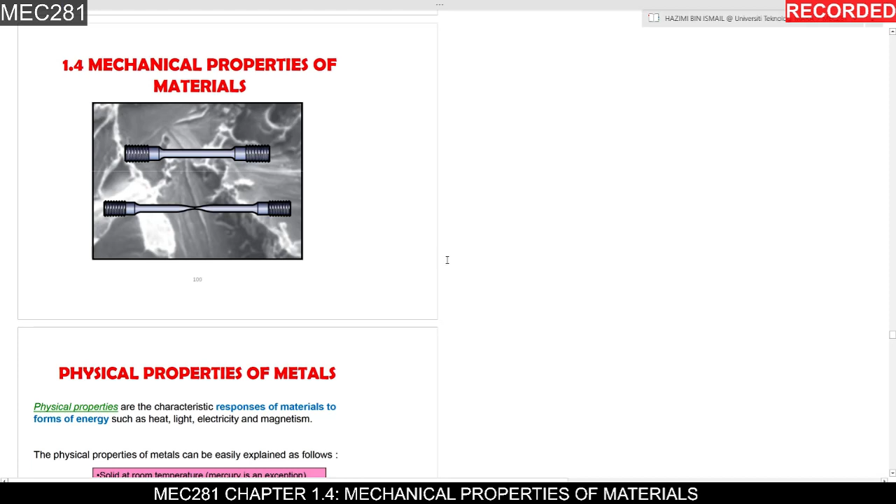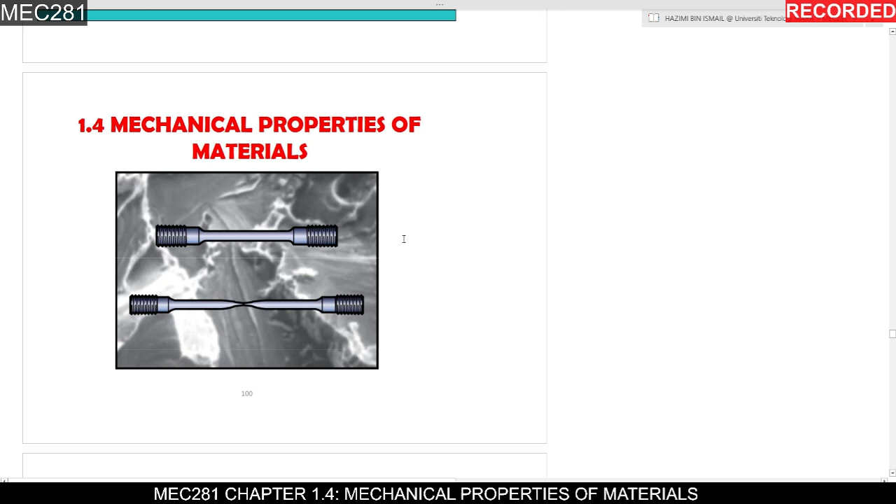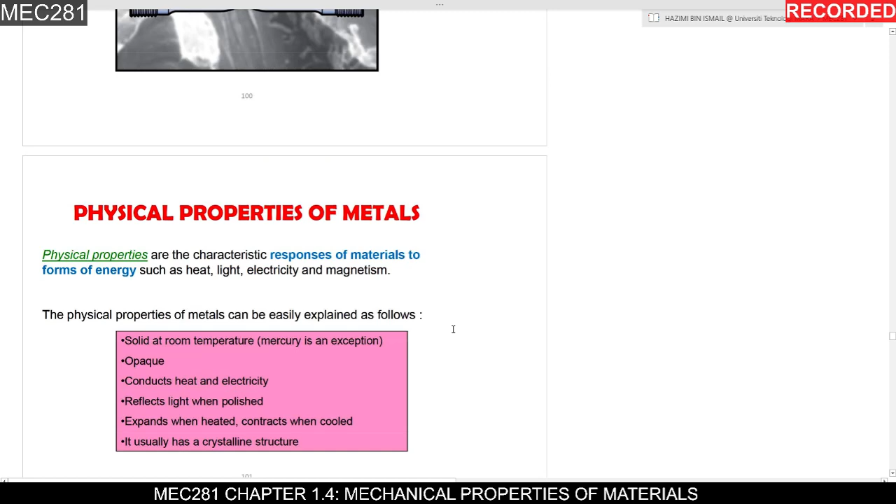In this video, we are going to learn about subchapter 1.4, mechanical properties of materials. This subchapter is more on the theories, and I will go faster in this video. At the end of this video, you have to do the exercises found in the notes, and then submit the answers through our Google Classroom.

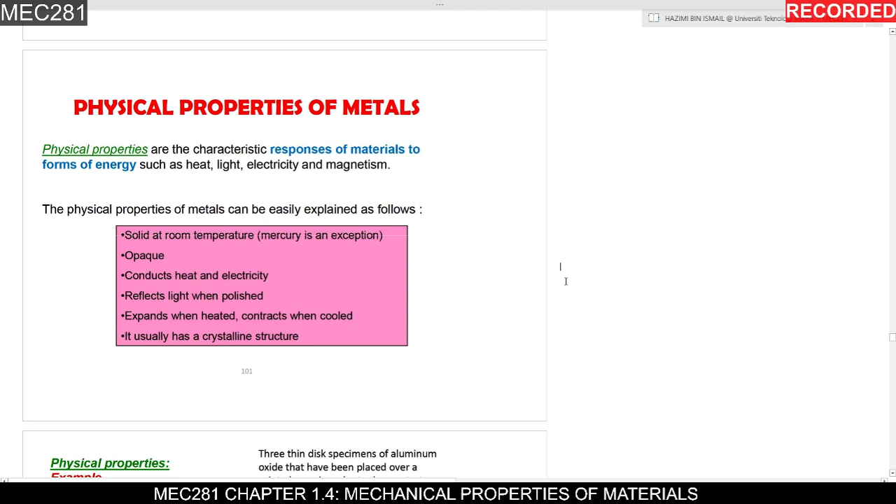Like I said, this chapter is more on the theories, so it's better if you read it in detail on your own, because if I read or explain these slides, it may become very boring and waste your time. So let's go faster in this subchapter.

Let's start with the definition of physical properties. Physical properties are the characteristic response of materials to forms of energy such as heat, light, electricity, and magnetism. The physical properties of metals can be explained as follows: solid at room temperature, opaque, conduct heat and electricity, reflect light when polished, expand when heated, contract when cooled. It usually has a crystalline structure.

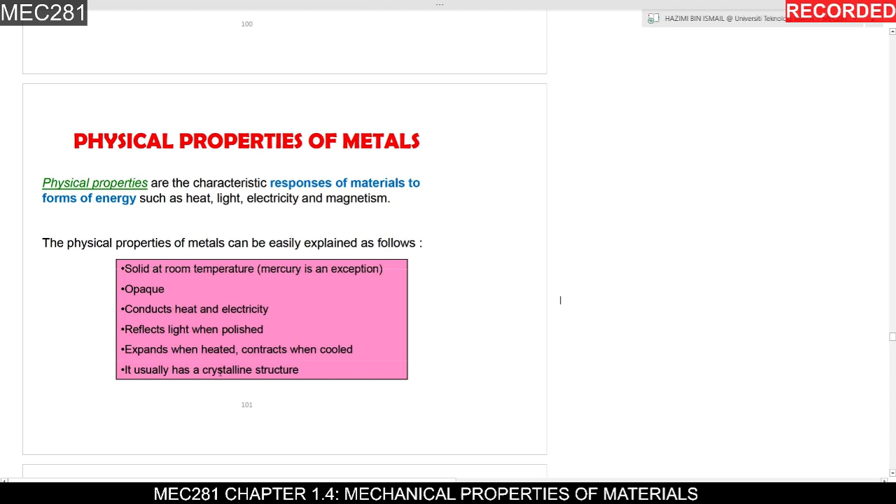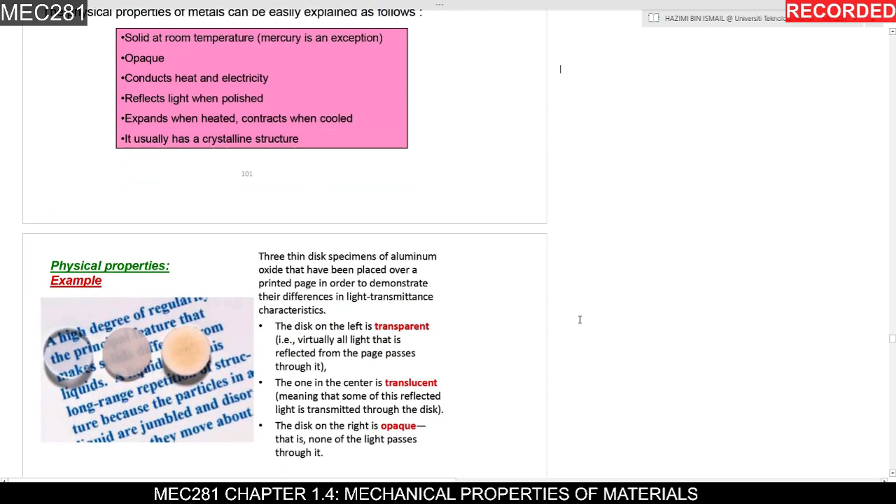You must be familiar with the term crystalline structure that we already learned in subchapters 1.2 and 1.3. An example of physical properties here is aluminum oxide. It has three types of properties. One is transparent; we know what transparent means.

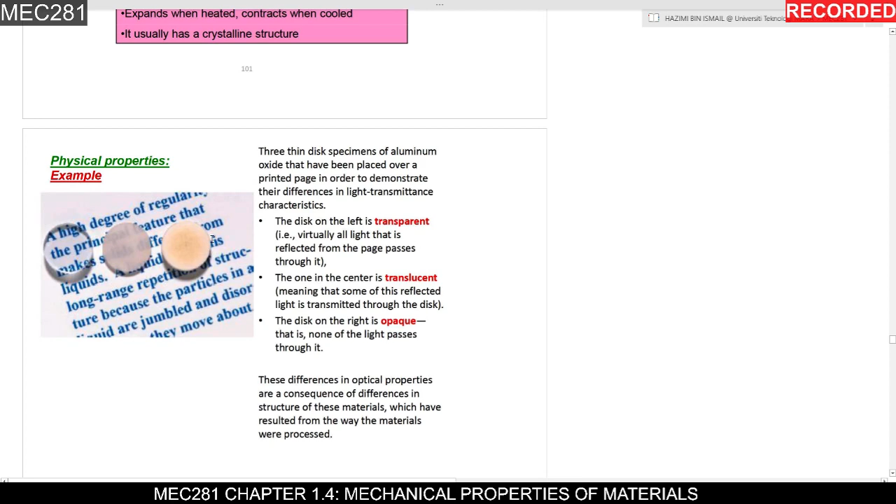Then there is translucent, separuh cahaya, semi light through. And then opaque, or in Malay we call it gelap, legap, right? So no light passes through materials with opaque properties.

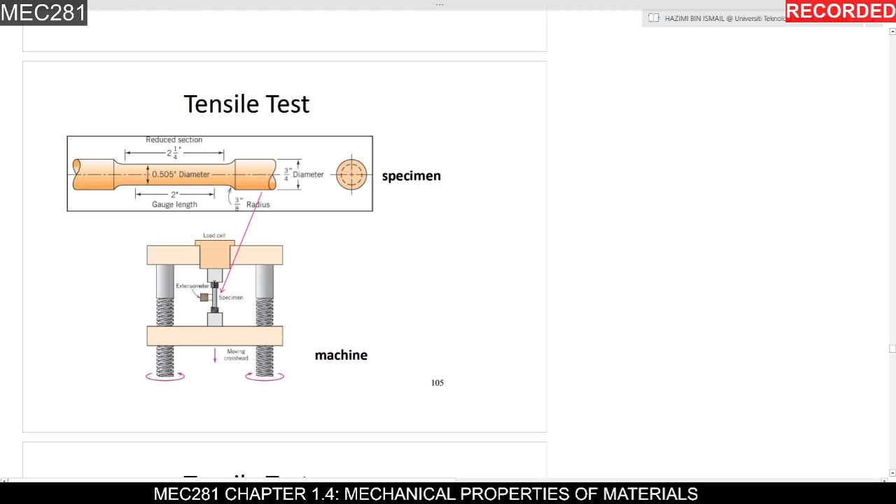I think you are already familiar with the term tensile. Tensile is focused on in the subject of strength, the other subject. So let's go through the tensile test: tensile stress and strain. This was already learned in the subject of strength, so I think you know about tensile stress, how to calculate the stress, and so on. Basically, the formula for stress is equal to force over area, like this.

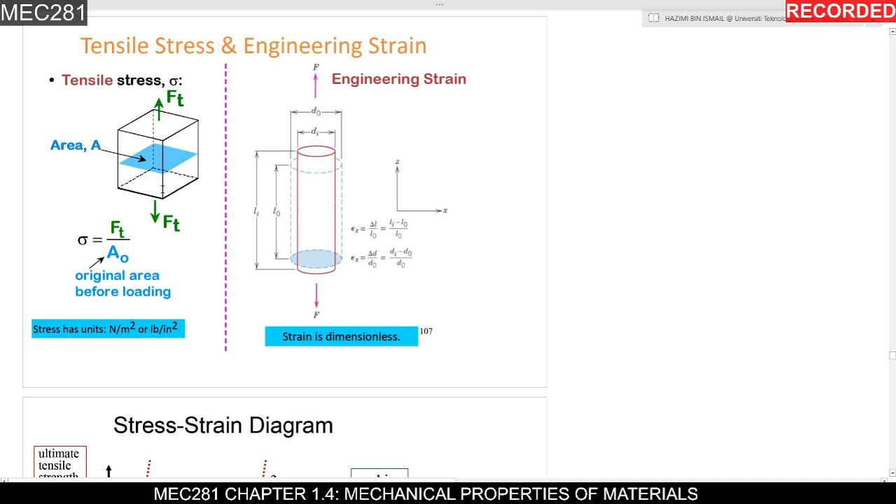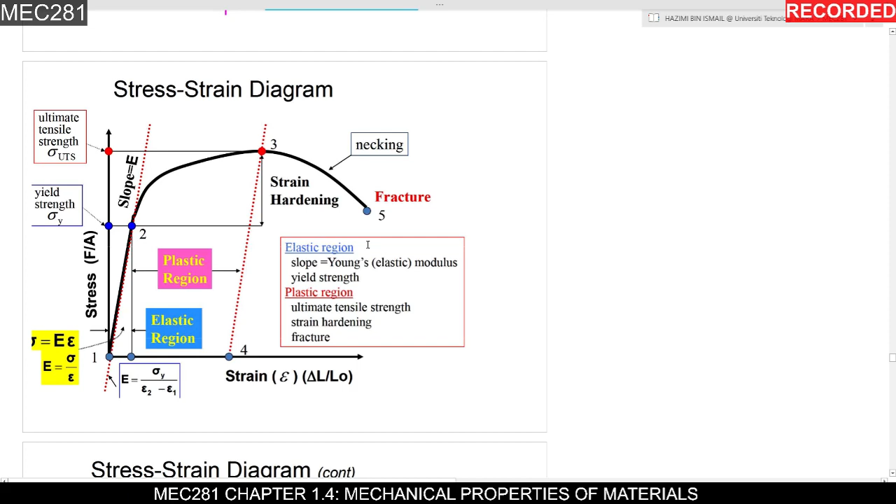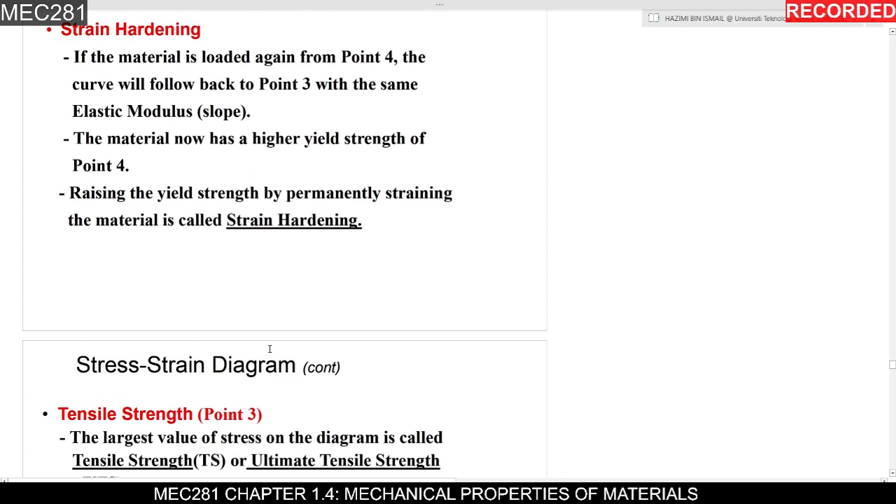This is the stress and strain diagram. From there we have what we call the elastic region and plastic region. What is the elastic region? In the elastic region, the material returns to its original shape after it is unloaded, like a rubber band. After it passes through that region, it will fracture. Putus dan lain-lain lah.

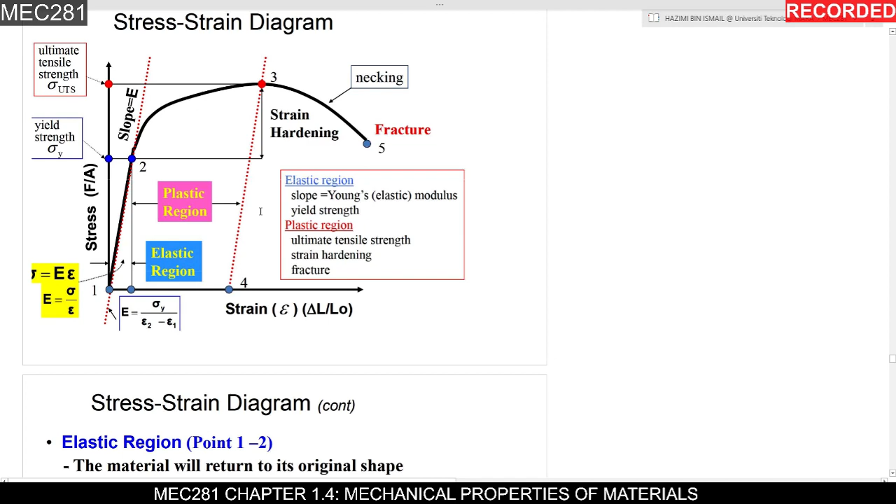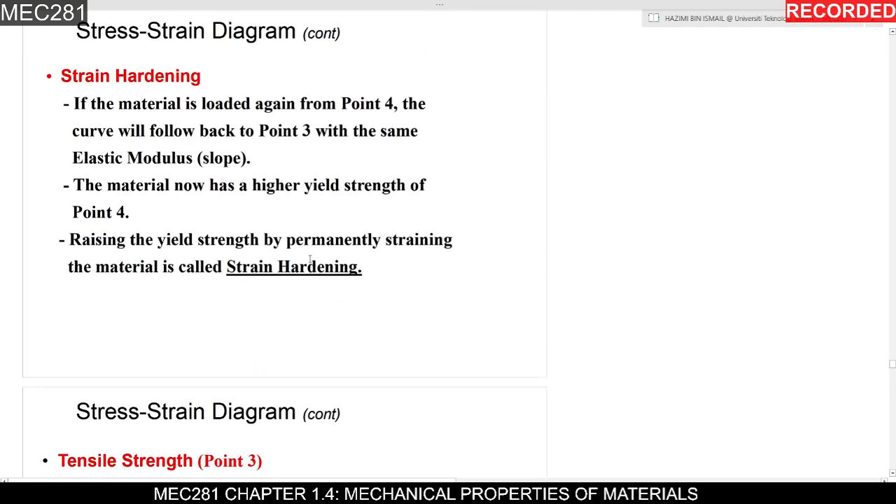So this is all about the stress and strain diagram. It can give you information about the elastic region, yield strength, and so on. I think this is more on your own effort to read in detail.

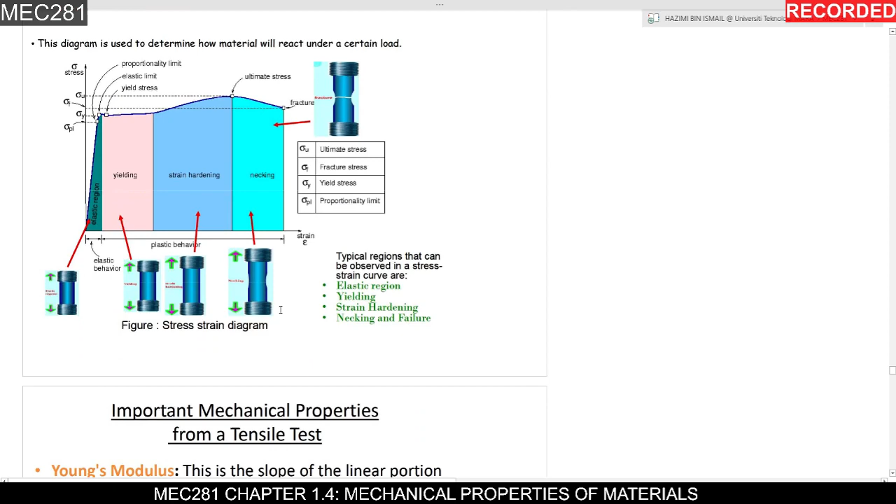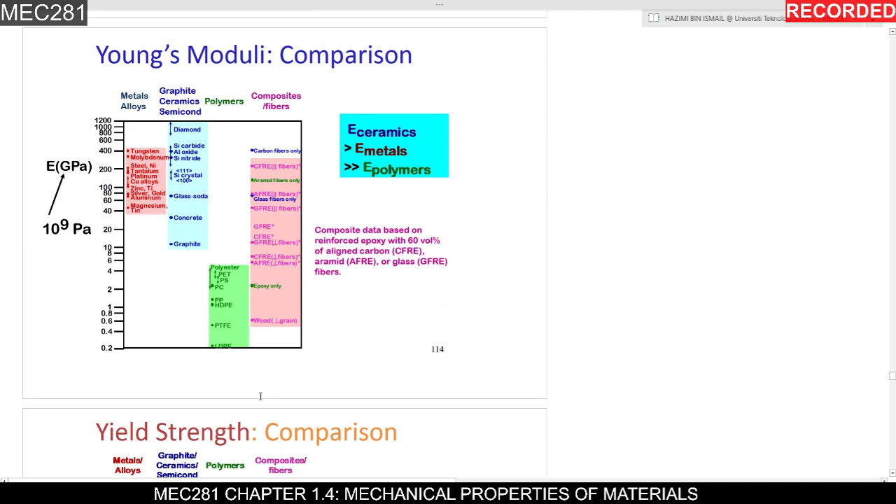Important mechanical properties from a tensile test: we can know the Young's modulus, yield strength, ultimate tensile strength, and percent elongation. So the tensile test is very important because we can know all of this information.

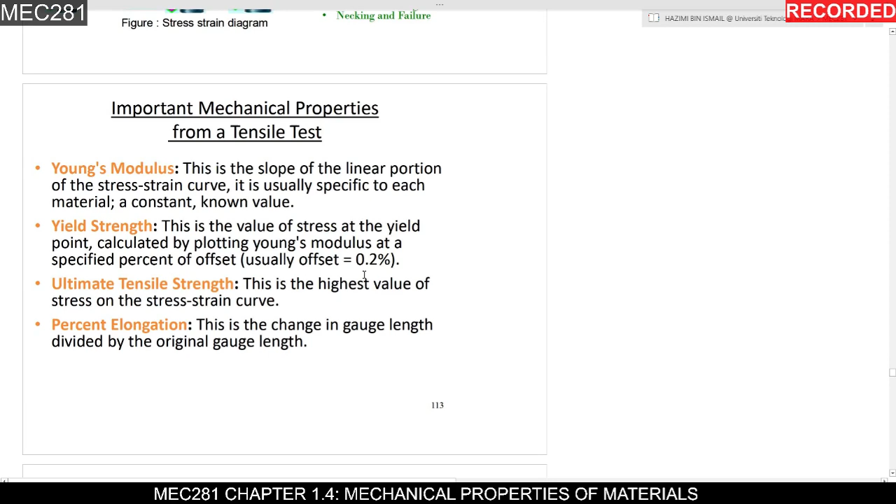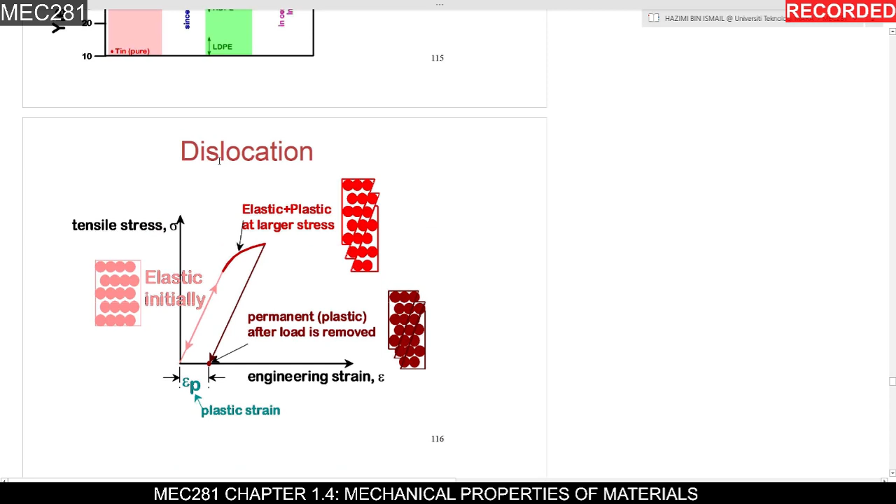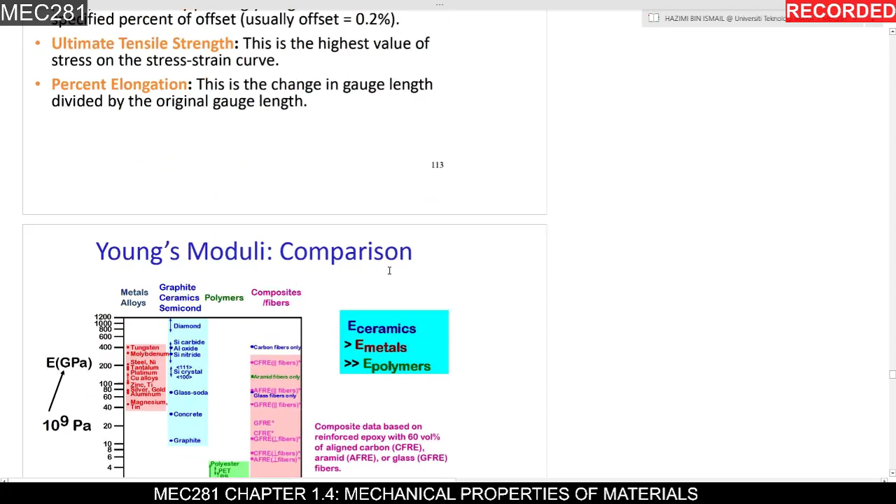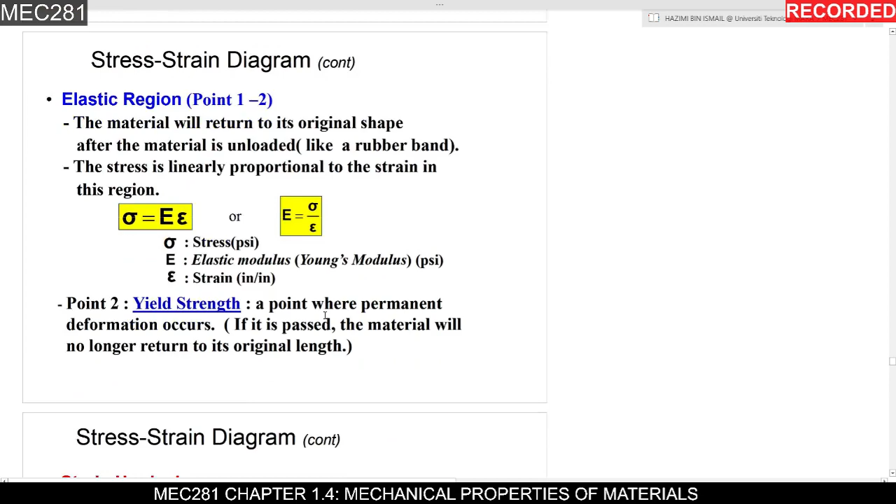Back to the basics of elastic: the material returns to its original shape after it is unloaded. That's why it returns to the initial shape after you unload the mass or force. Atomic bonds are stretched but not broken. Once the force is no longer applied, the object returns to its original shape, and elastic means reversible. It can stretch and return back to its original shape. That's what we call elastic. And then plastic deformation.

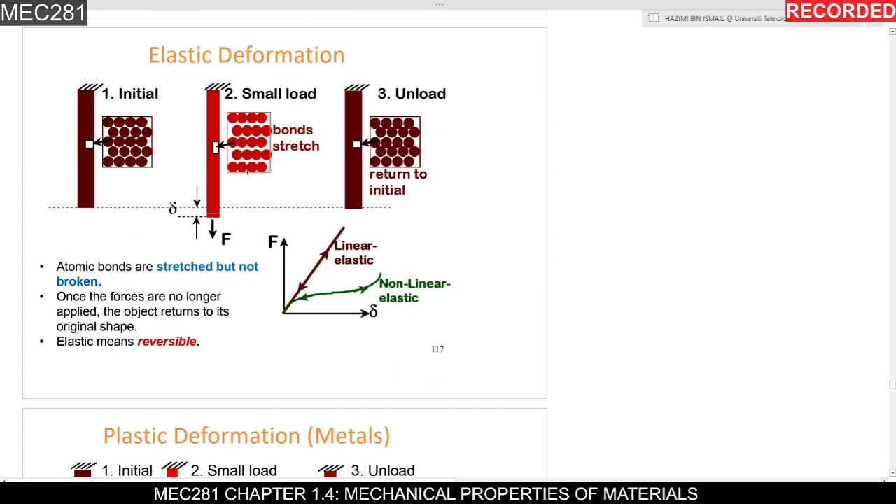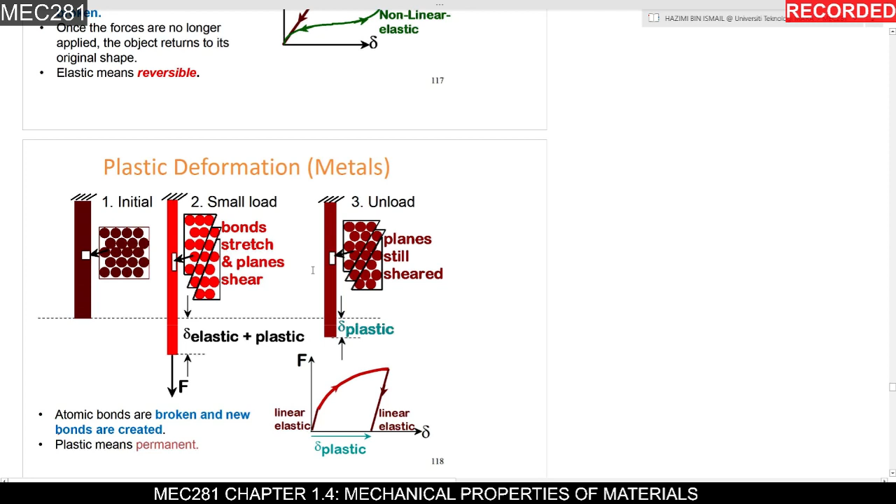Okay, the difference compared to the elastic deformation here is when you put the small load, the bonds stretch and the planes shear. Okay, and then when you unload that force, the planes still shear. Okay, so it will change the formation of that material. So atomic bonds are broken and new bonds are created. Plastic means permanent. So elastic means reversible, plastic means permanent.

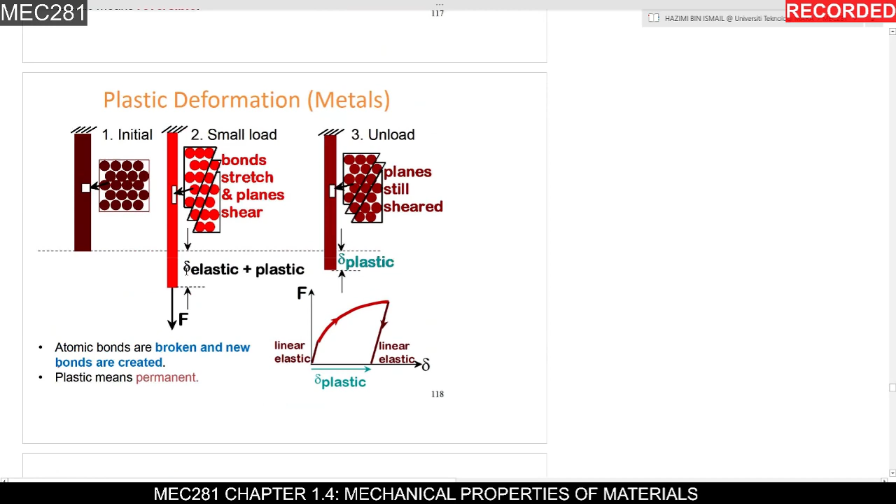So if I say that material is plastic, when you put force, the shape changes, and the changed shape will remain, and it cannot go back to the original form. Okay, so that's the difference between plastic and elastic.

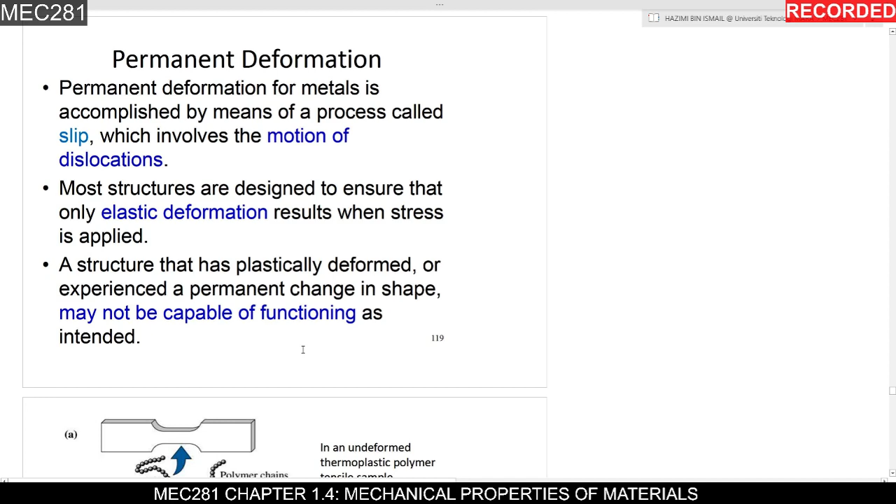Okay, permanent deformation. Permanent deformation for metals is accomplished by means of a process called slip, which involves the motion of dislocations. Most structures are designed to ensure that only elastic deformation results when stress is applied. A structure that has plastically deformed or experienced a permanent change in shape may not be capable of functioning as intended. So that's why in most engineering applications we try to have materials with elastic deformation properties.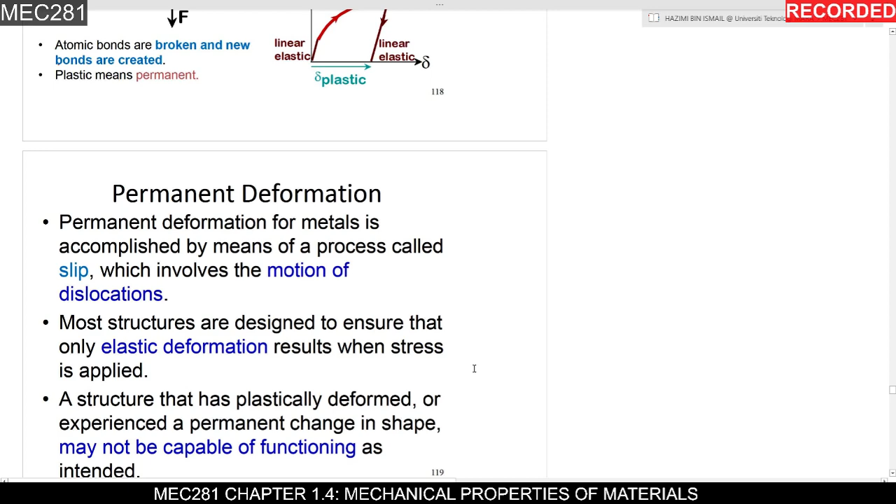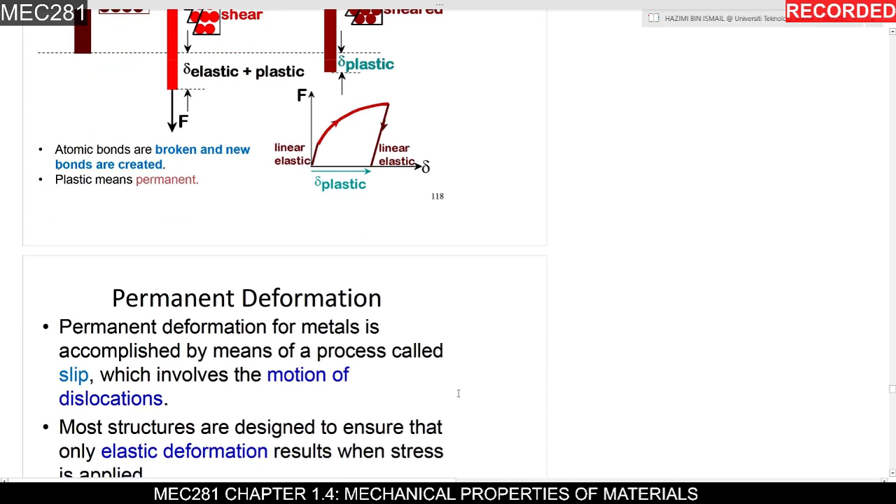Okay, can you imagine if we put plastic deformation materials on a structure, on a bridge structure? When it changes form a little bit through the heating during a very hot day, what happens? Then it can fall. Okay, so that's why we have to study the material properties of any metals in engineering applications. It is very essential.

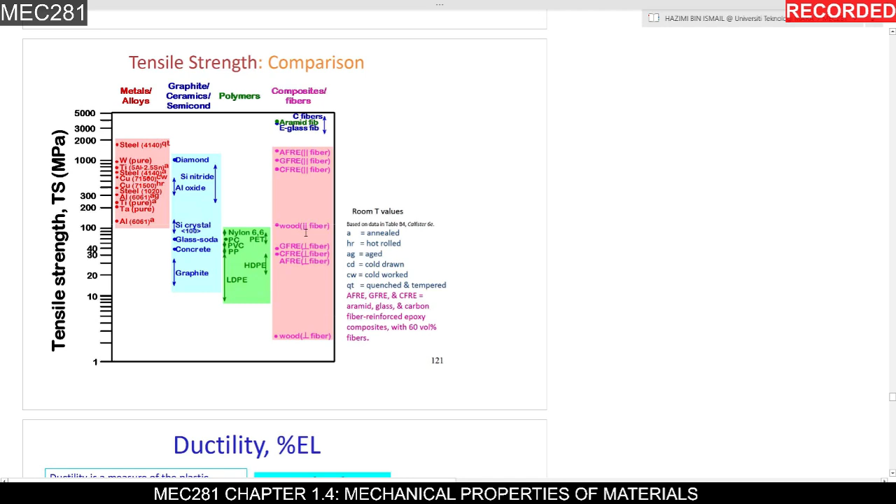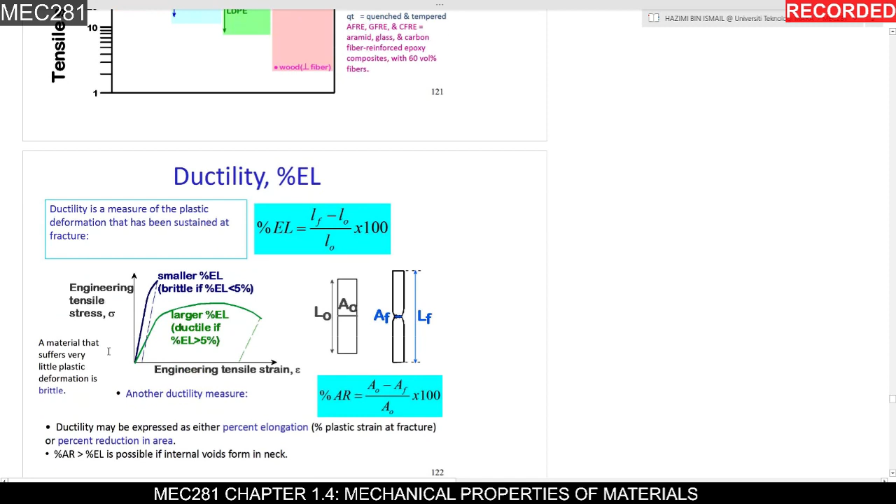So this is about the tensile strength. You can see here from this graph, the tensile strength of steel and so on has a much higher value compared to fiber and composites like wood. Okay, and ductility. What is the meaning of ductility? Ductility is a measure of the plastic deformation that has been sustained at fracture. And this is what we call the equation for the ductility value. So you have to know the basics of what ductility is.

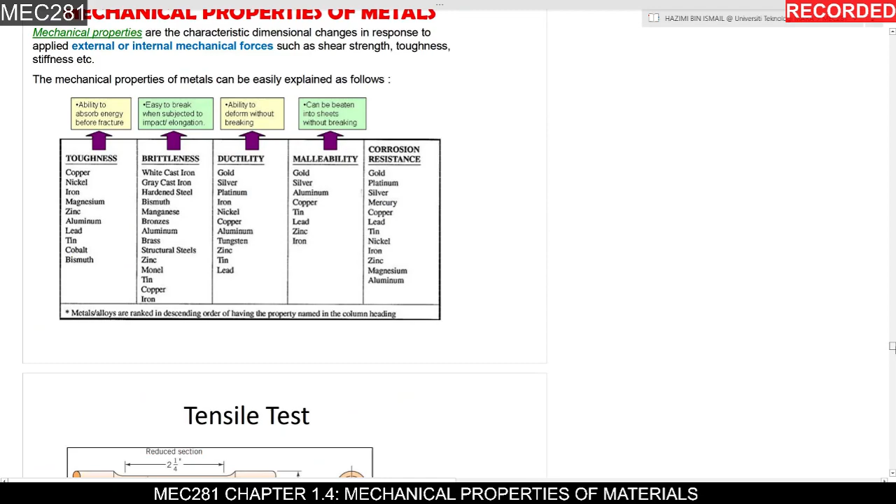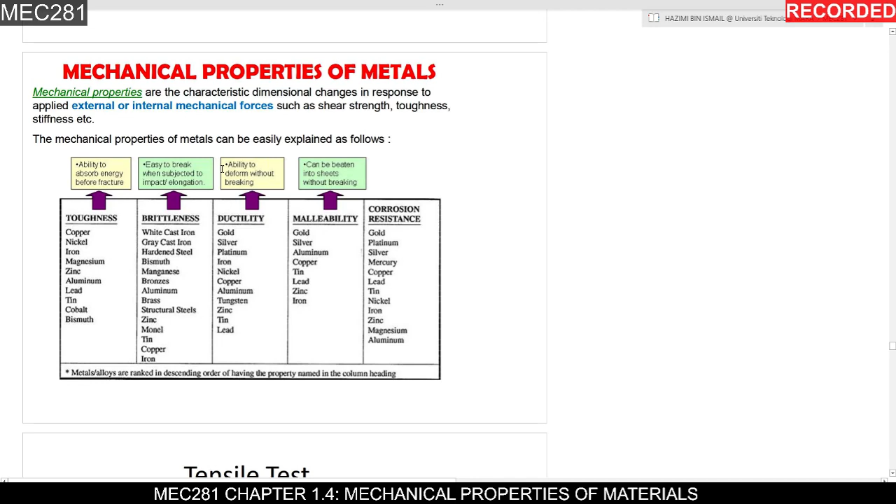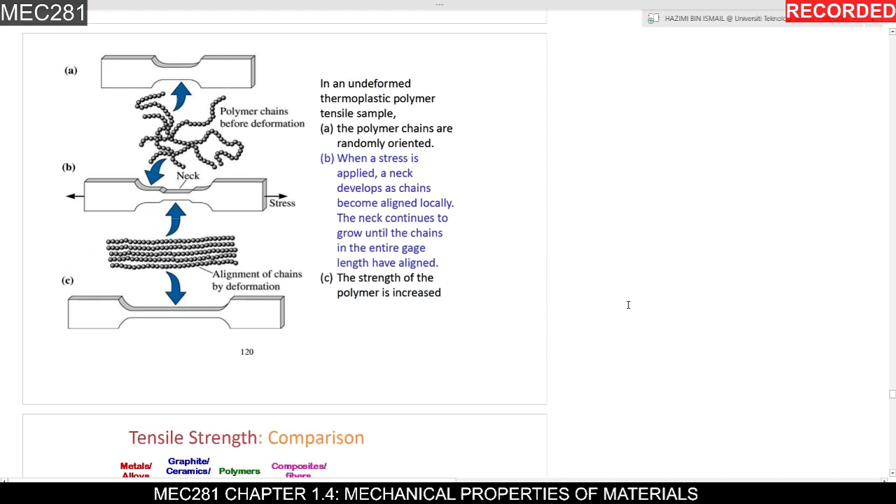And then the toughness. Toughness is the ability to absorb energy up to fracture. If you are still confused with the definition, you can return to the early slides that explain what toughness, brittleness, ductility, and malleability are. Once again, let's try to define ductility. It is an ability to deform without breaking. So more ductile means that it can change form without breaking, undergoing permanent deformation.

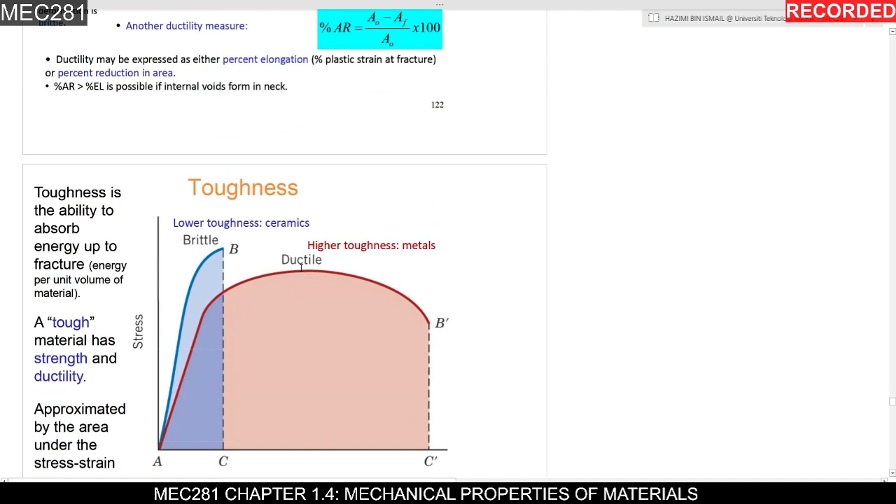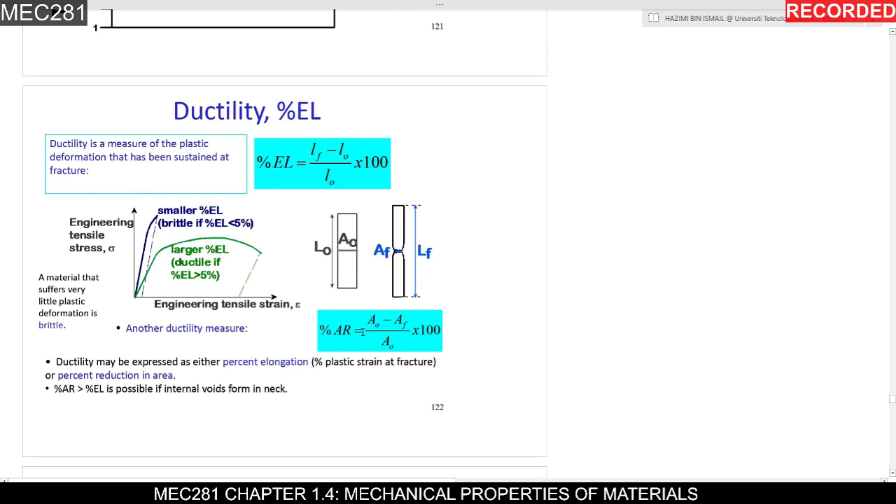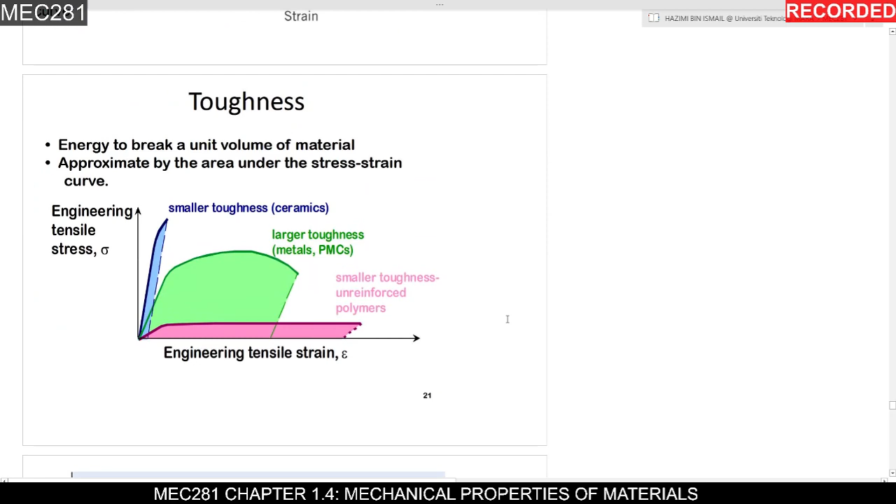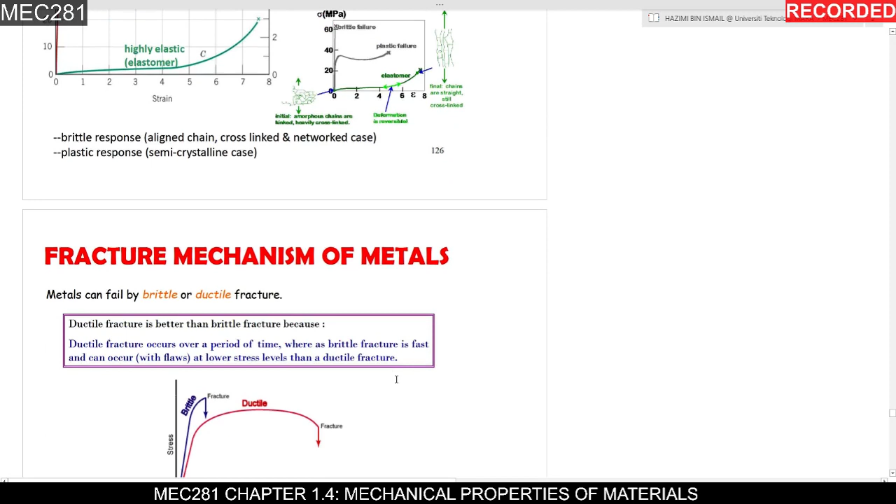Okay, so from the value of ductility here, we can know what is the best material for your engineering applications. So that is what we study about material mechanical properties. It's all text, so that's why I mentioned earlier you have to read it on your own. If I just read these slides, it may become boring. So let's go faster.

Okay, fracture mechanism of metals. Metals can fail by brittle or ductile fracture. Ductile fracture is better than brittle fracture because ductile fracture occurs over a period of time, whereas brittle fracture is fast and can occur at lower stress levels than ductile fracture. So ductile means that it takes time to fail, but brittle is instantaneous, very fast to fail.

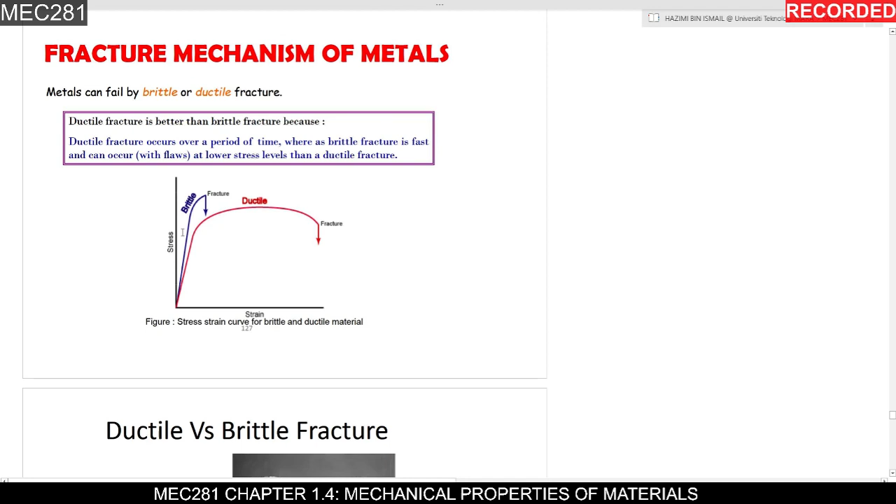Okay, so this is the diagram showing the difference between ductile and brittle fracture. From here I think it is logical, it takes a very long time to break here, right? Compared to this brittle one where it just snaps,

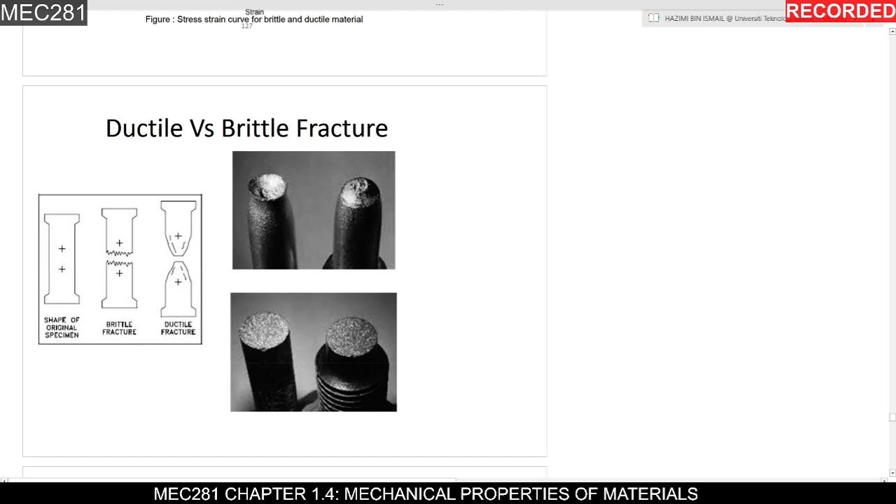Okay, this one is the ductile fracture and this one is the brittle fracture. You can read it on your own.

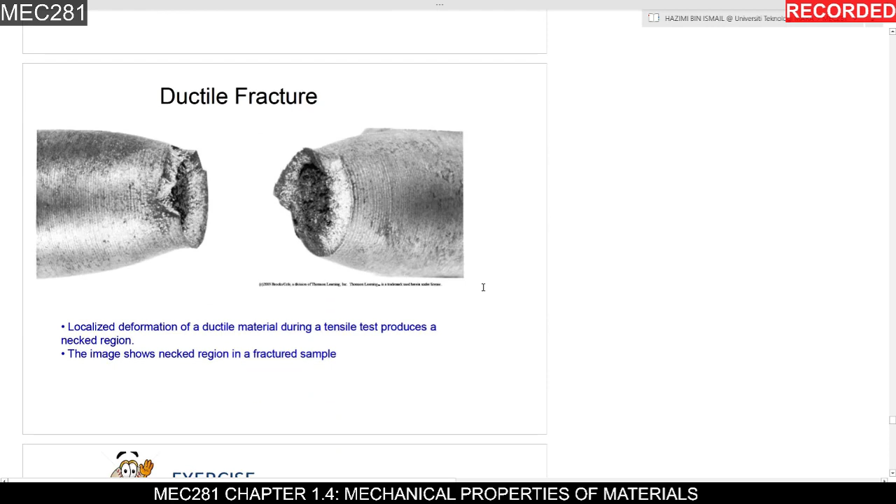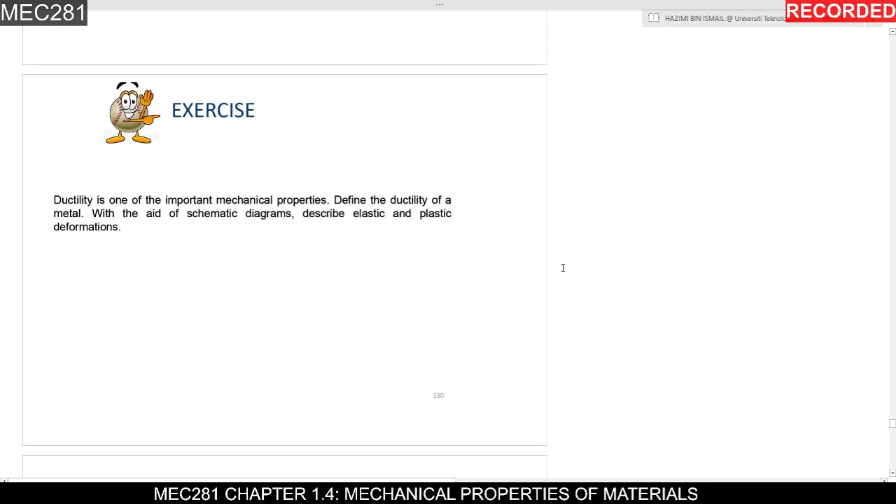Okay, so this is the exercise. This is one of your questions that you have to write, and your answer has to be submitted through Google Classroom. Please remember, you have to complete this one and submit it via Google Classroom.

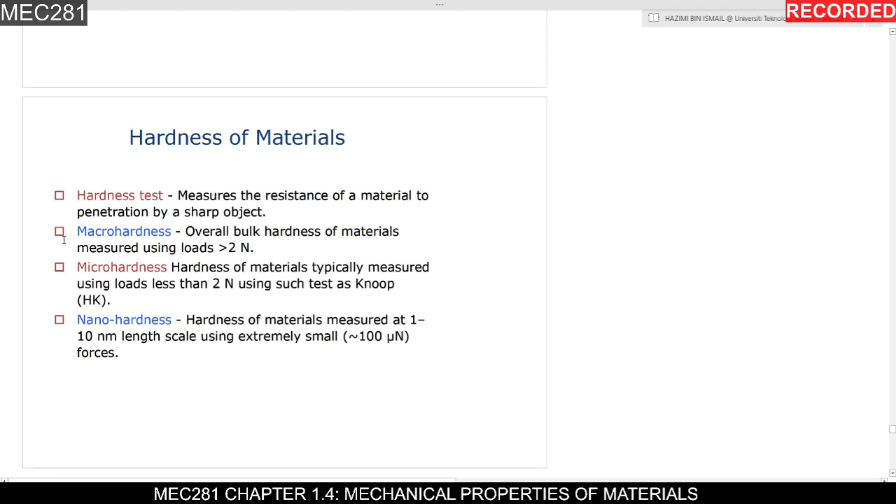Nano hardness is measured at the range of 1 to 10 nanometer length scale. In newtons, it is around 100 micronewton forces. So hardness tests can be categorized into three: macro, micro, and nano hardness. Hardness is a measure of a material's resistance to localized plastic deformation, such as a small dent or scratch.

Quantitative hardness techniques have been developed where a small indenter is forced into the surface of materials. The depth or size of the indentation is measured and corresponds to a hardness number. The softer the material, the larger and deeper the indentation and lower hardness number.

So basically, the test is where you put a very sharp material on the specimens, and if it has the indentation and it becomes a deeper indentation, it means a lower hardness number.

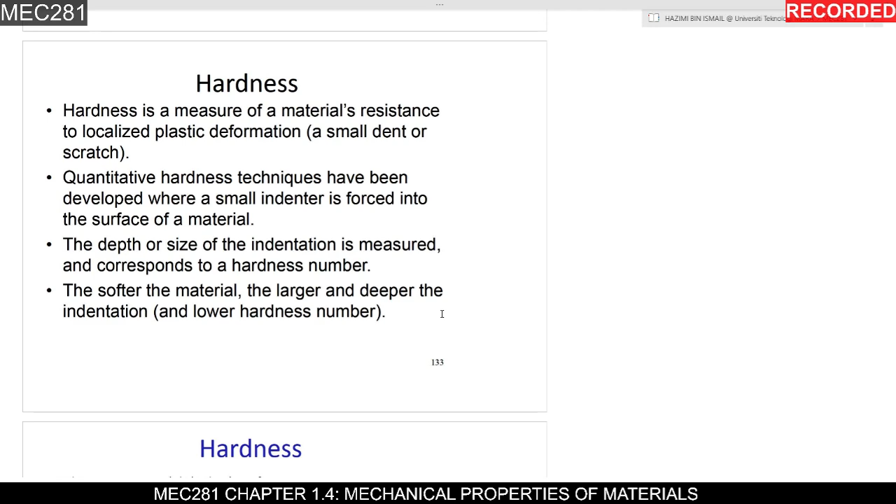Resistance to permanently indenting the surface. Once again, definition of hardness: resistance to permanently indenting the surface. Large hardness means resistance to plastic deformation or cracking in compression. Okay, better wear properties.

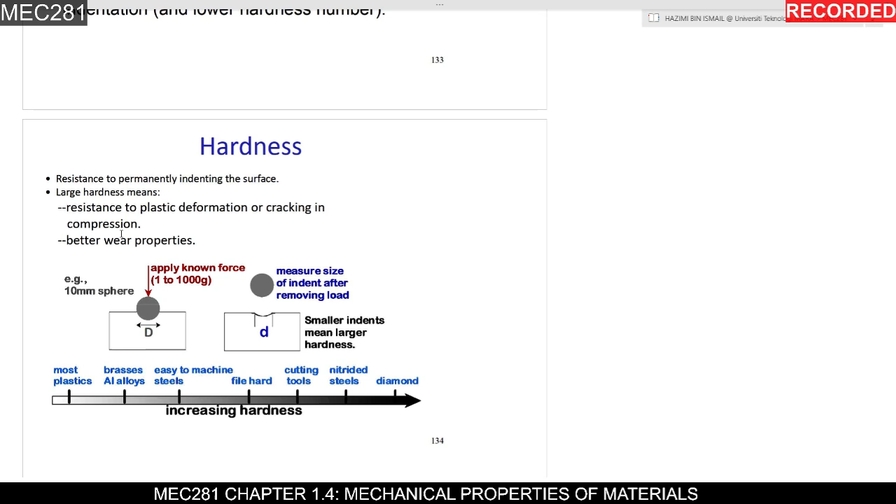Of course, diamond. Diamond is the hardest natural material in the world, as we have found until now. So for plastic, most plastics are easily damaged, easily change shape, plastic deformation. So that's why it has a very low hardness value.

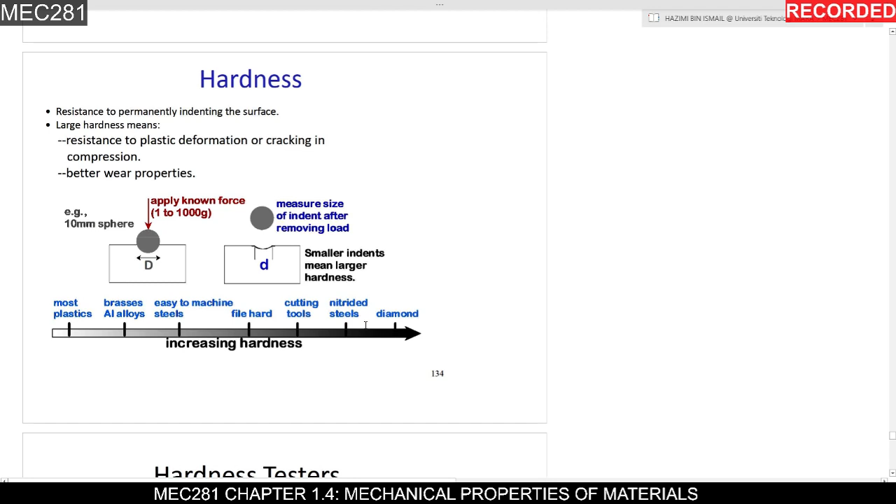Okay, so these are examples. These are the hardness testers. You can find many hardness tests on YouTube where they test many materials, like balls, like any daily applications. I think they do the test to show you the hardness of those materials. You can try searching on YouTube.

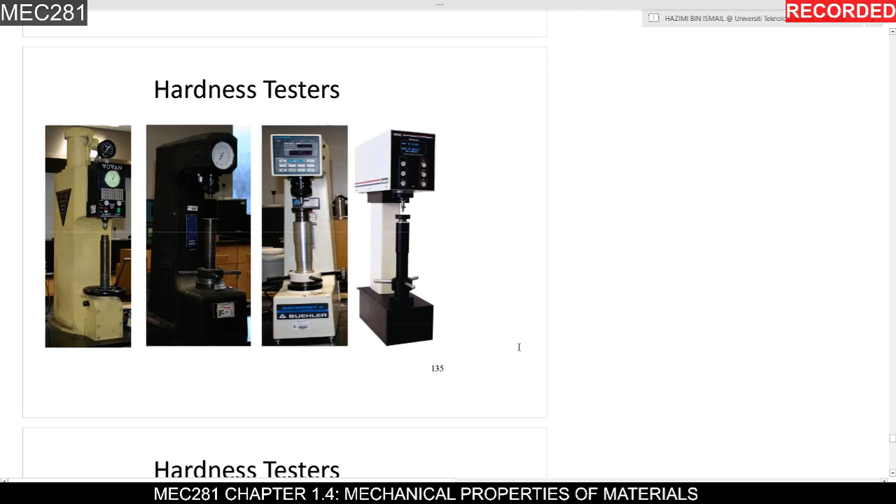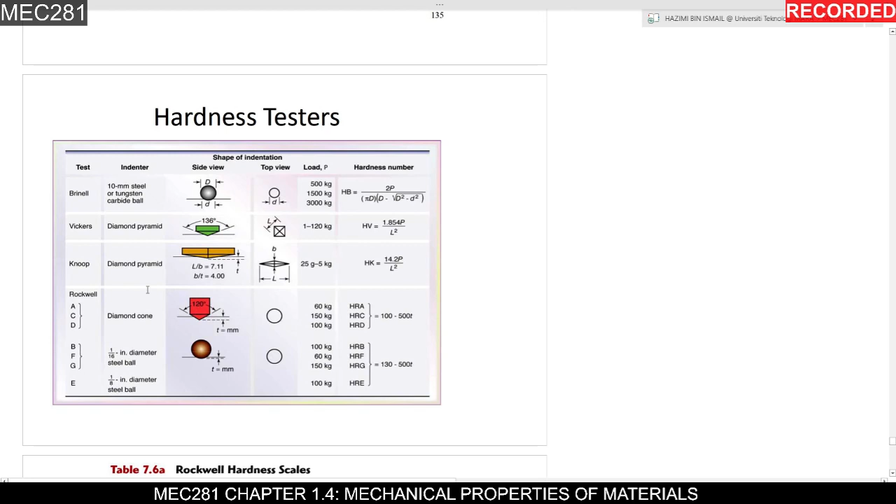Okay, so there are many tests for hardness. These are the examples. The names of the tests: Brinell, Vickers, Knoop, and Rockwell. So it depends on the value of the hardness number that you want to test.

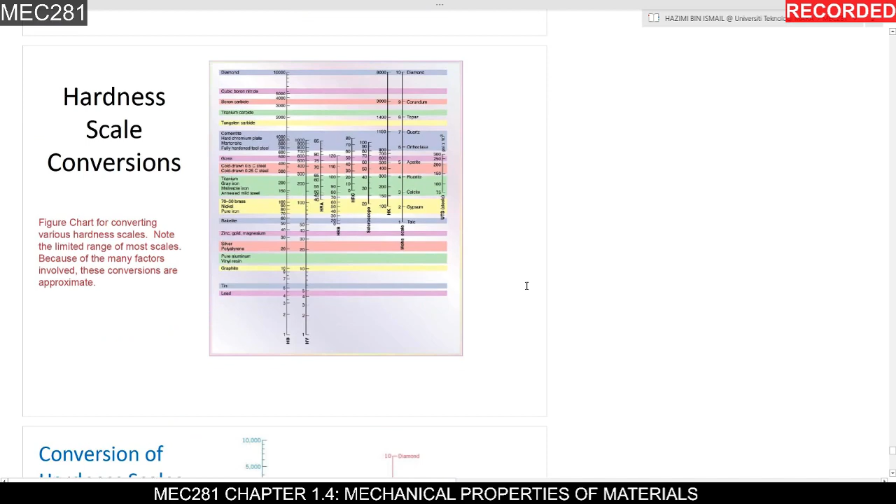So, conversion of hardness scales. To standardize the value of hardness, ASTM, which is an organization in the United States, put the correlations here between the hardness numbers in the Knoop, Brinell, Rockwell, and Mohs tests.

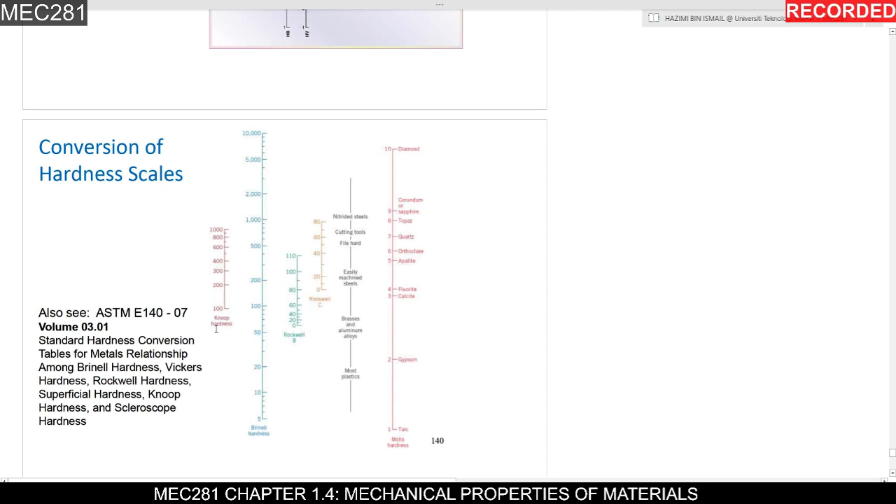So you can see here diamond. Of course, diamond is the hardest material in the world. And then if you want to use sapphire, sapphire is also very high, around 9 in Mohs hardness, equivalent to around 1200 in Brinell hardness. So that's how you convert between these tests to know the value of the hardness scales.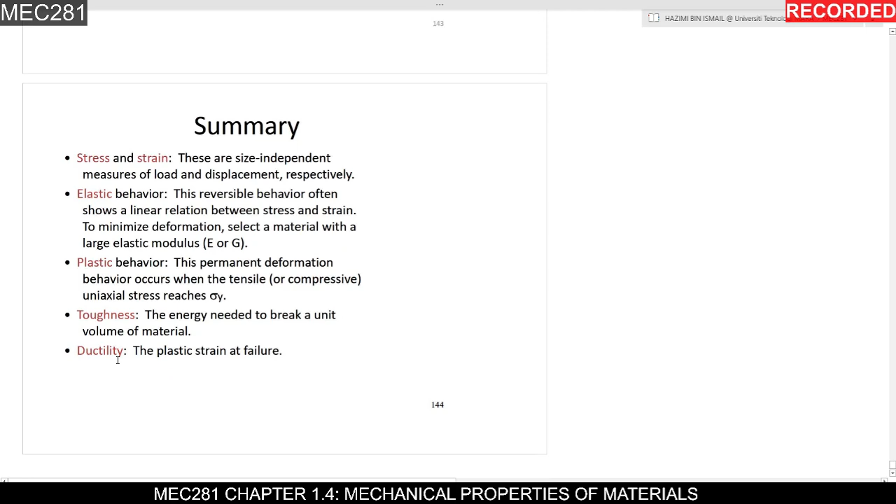And then we have toughness. Toughness is the energy needed to break a unit volume of material. And then ductility is the plastic strain at failure.

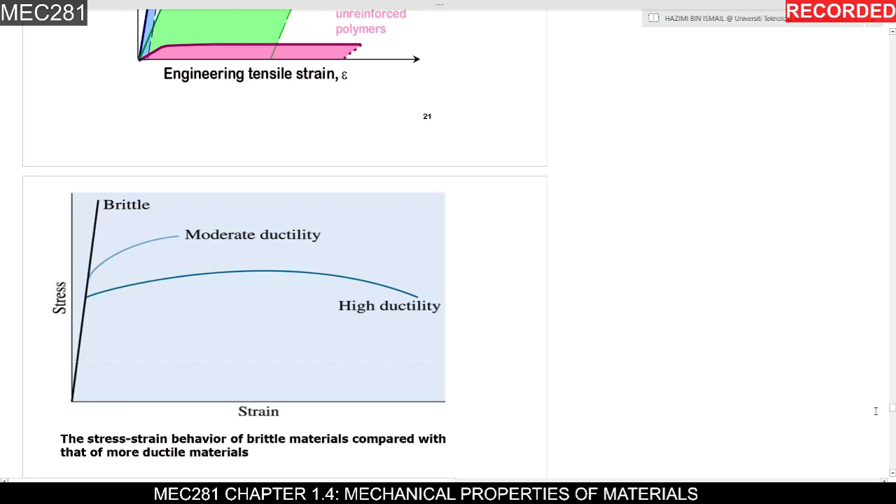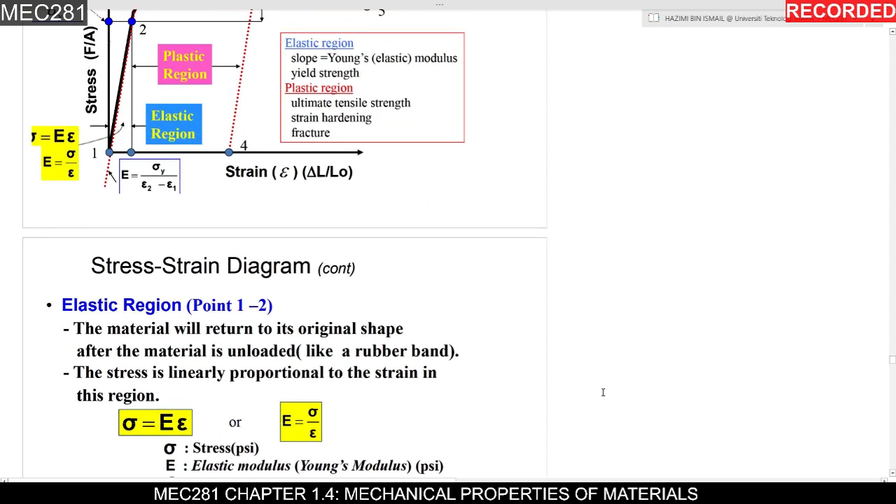Once again, please read again and study again, and if you have problems, you can ask me in the WhatsApp group. I'm sorry I went faster with this subchapter because it is very theory oriented, and I do not want you to become bored with my videos. This subchapter is more self-reading and self-memorizing. You have to memorize most of the definitions and information on the mechanical properties.

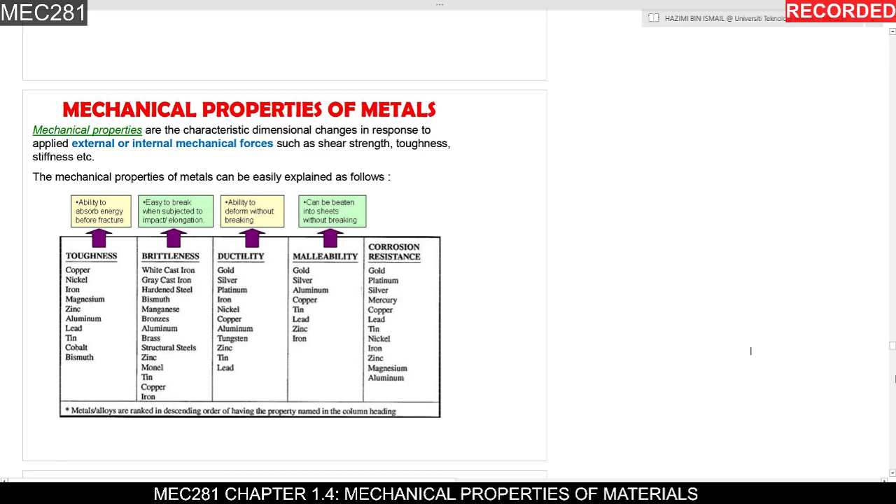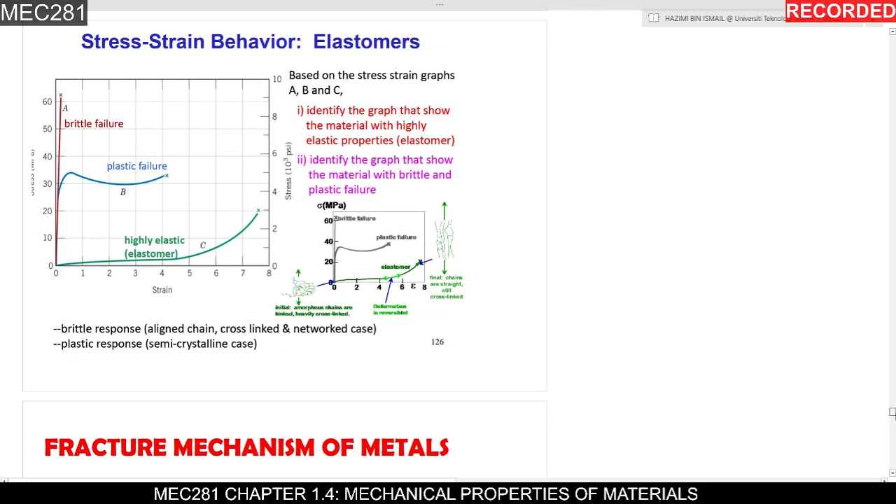Okay, so thank you, and don't forget to do this exercise. I will put the post in the Google Classroom. You have to submit your answer for this exercise there.